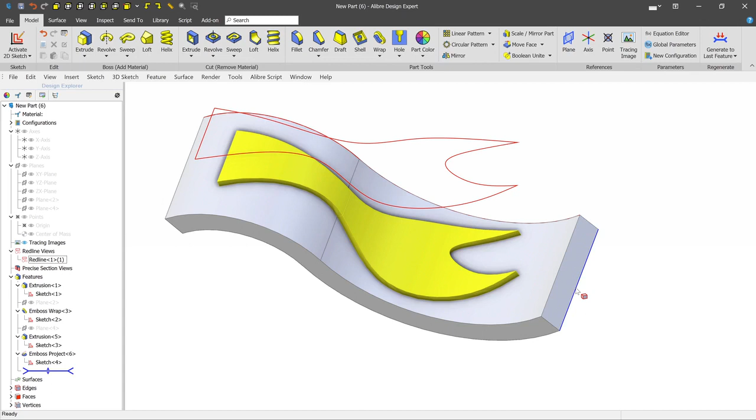Version 25's Wrap feature is extremely powerful and can do a lot of things. If you haven't watched the video on Wrap, you should probably do that before you watch this video. Now, despite Wrap's power, there are a few design implications that you need to be aware of. So let's take a look at this example.

We have this sketch that's been wrapped onto these two surfaces. And if we take a look at this from the top, we can see the first design implication that we're going to face. And that's that when we look at the sketch through the sketch normal, in other words, straight down, we notice that we don't necessarily get alignment between the sketch itself and the geometry that's been created.

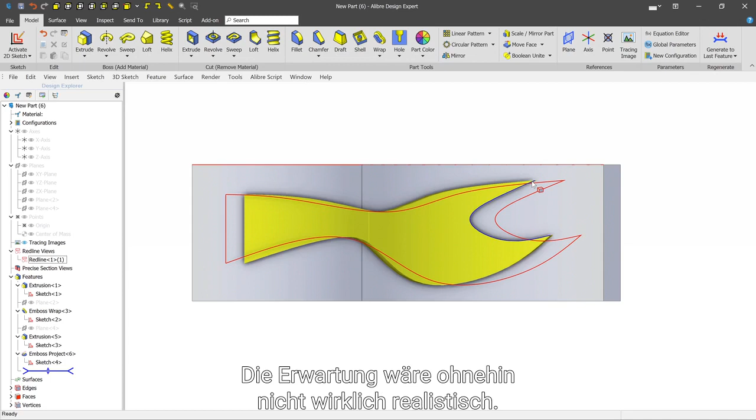Due to the very nature of how Wrap is supposed to work, for example, wrapping around a cylinder, this expectation wouldn't really be realistic anyway. But sometimes you do need the kind of effect of Wrap with the certainty that the sketch and the resulting geometry will align, at least when looking through the normal of the sketch. And for this, we have a new tool called Project.

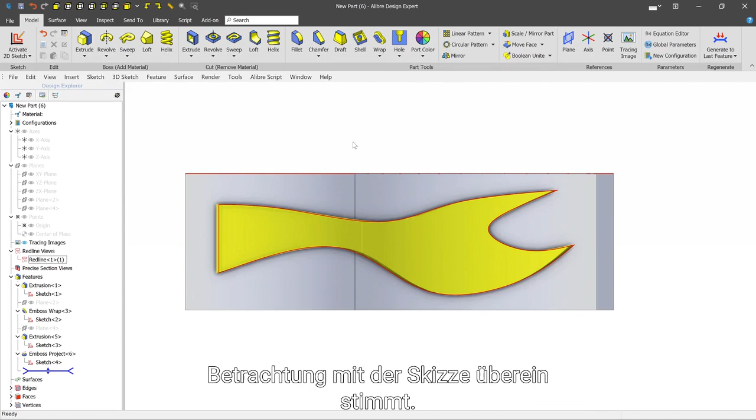Project is found on the Wrap dropdown here and works pretty similarly to the way Wrap does, but has the caveat that the resulting geometry will closely match or exactly match with the sketch when viewed straight down from the sketch or through the sketch's normal plane. We can take a look at the resulting geometry here, and in this particular case, it's not too dissimilar from Wrap's result, but there are many cases where the results will be dramatically different.

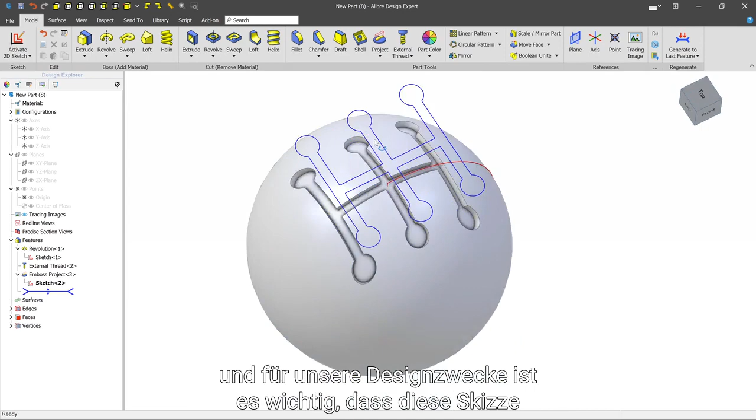In this example, we have a shifter knob that we're designing, and for our design purposes, it's important that this sketch be relatively consistent when viewed from the top. Because of this requirement, we would use an emboss project. Let's go ahead and edit the emboss project to see the options that we get.

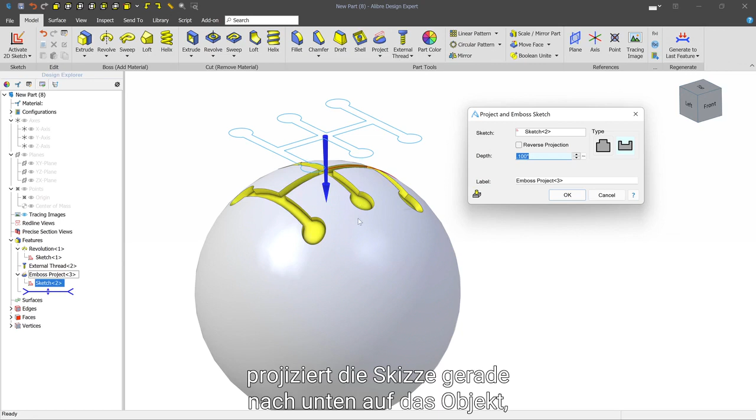The dialog looks pretty similar to the Wrap dialog, but because the tool takes the sketch normal as the direction and basically projects the sketch straight down onto the object, we don't have any of the sketch options that Wrap does, which would let us pick the orientation of the sketch relative to the target geometry. But just like Wrap, we also have the type. We can do an emboss and a deboss, and we can choose the depth of those.

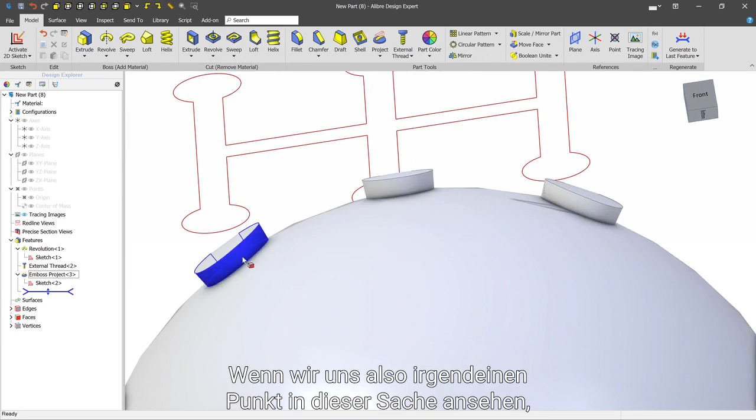The resulting geometry is always going to be normal to the target surface. So if we look at any point in this, we can see that the geometry comes off at the normal to the sphere. If we look at this from the top and start to ask ourselves what might happen as the geometry gets closer and closer to the side of this, in other words, at a glancing angle to the geometry, we might start to understand the differences between Wrap and Project and when they might be used.

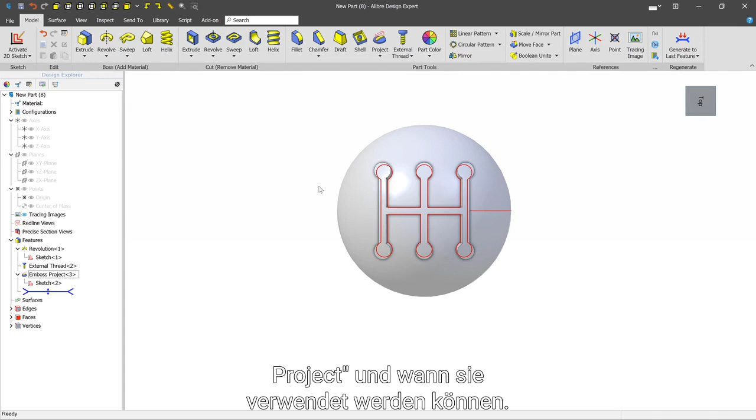Let's modify this sketch and add a quick circle. And we want to get it as close to a glancing angle as we can so we can see the maximum distortion. We'll go ahead and deactivate.

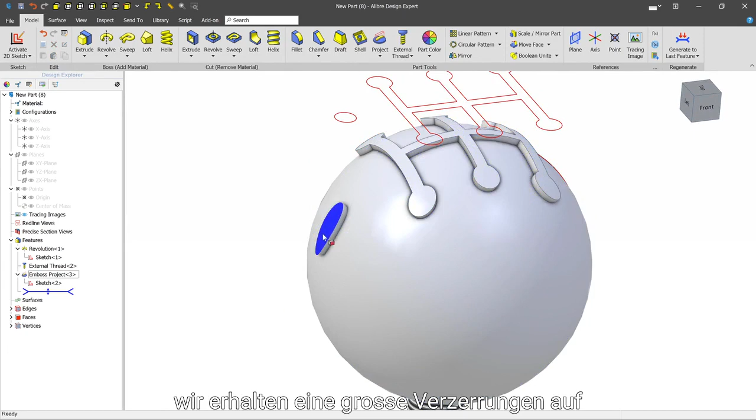And we can see that on this area of extreme curvature change, we get a lot of distortion on this circle. So you can choose Wrap when you want the local geometry result to be more consistent with the sketch itself. And you would choose Project when you want the resulting geometry to very closely match the sketch as viewed through the sketch normal.